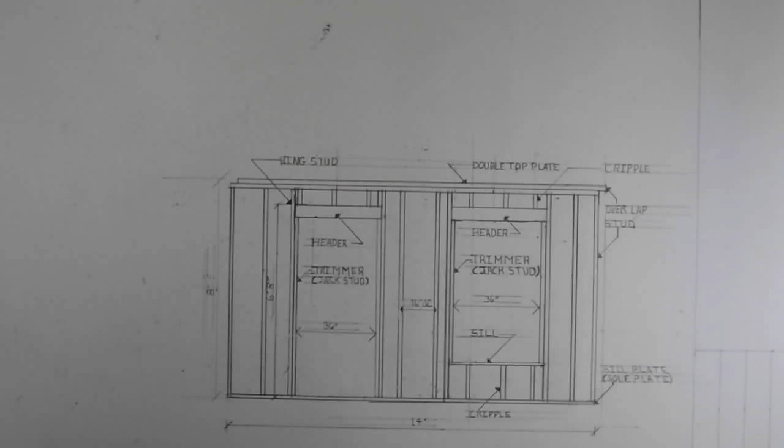Okay, this is part of what we're going to be drawing on this page. And again, this is a 12 by 18 page. We're going to have a total of 3 pictures on here. This one right here is a wall panel. Then we're also going to show a kind of a cutaway view of a wall here, showing the materials that are inside of the wall.

And then up over in the left-hand corner, we're going to have, let's see, I planned to put something there and I forgot what it was. Oh yeah, how the wall meets with the ceiling section and the roof and everything else. But this is a wall panel. This is 14 feet by 8 feet tall. Okay, and it's made up of all these different parts.

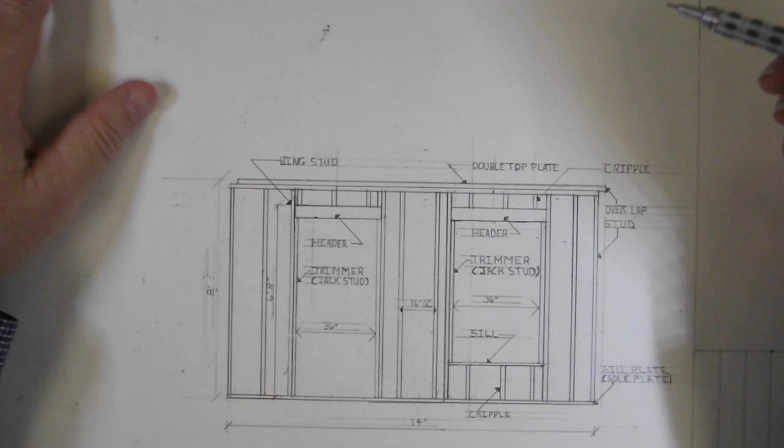And of course, the only reason it looks so busy right now, normally it wouldn't look like this if you were just drawing this for a regular plan. But because this is a lesson, you have to know all the parts and what they're called. You need to know all these parts very well, okay? So don't come to me and ask me about what size a thingy should be. You need to be able to name something and tell me exactly what it is. But anyway, I'll kind of go over those parts here.

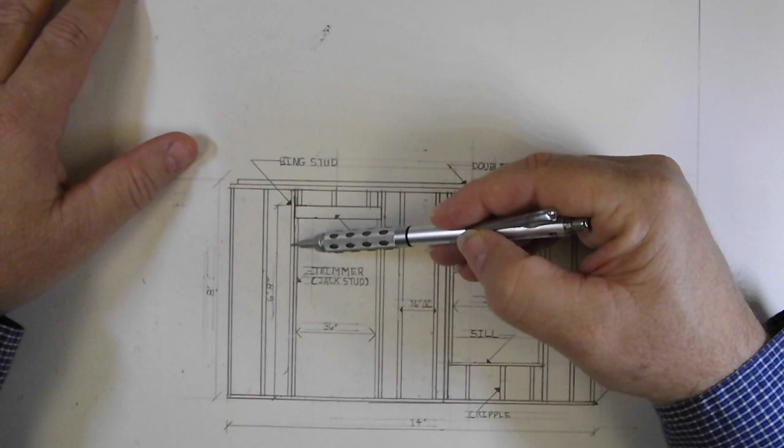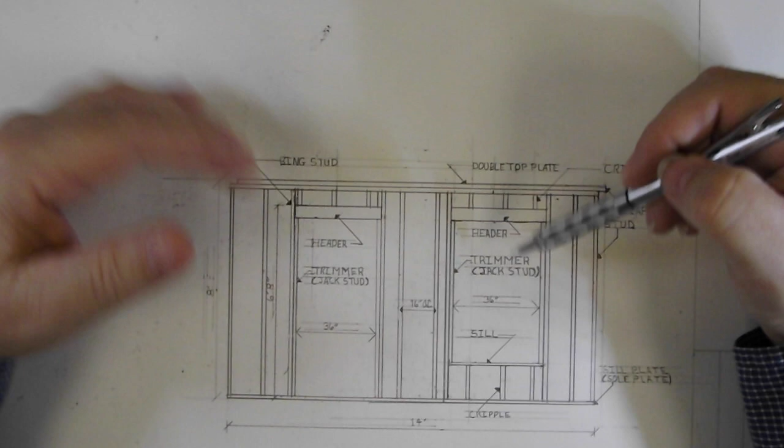King stud, that is the stud that always runs alongside any hole that is cut into your wall panel, such as, here's a door and here's a window. And you see I have king studs on both sides, king stud here and a king stud here. Okay, and that's just to add additional support, because anytime you cut away any members inside of the wall, then you're actually jeopardizing the integrity of the wall. However, we shore that up with things like king studs, and there's a few other components here that we shore that up with.

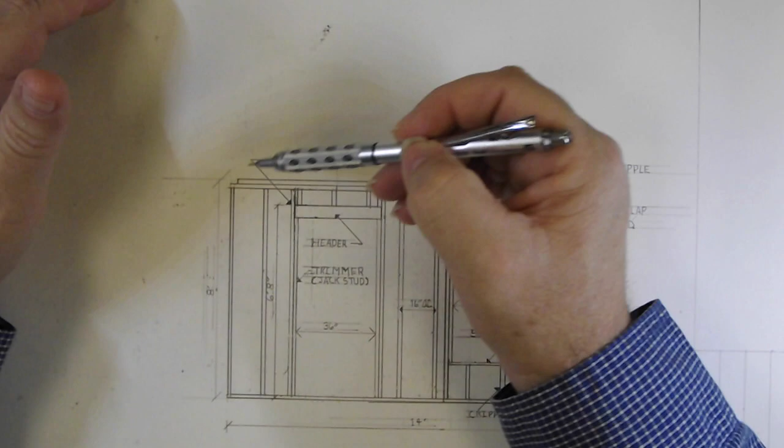Along the top here we have what's called a double top plate. So there's two 2x4s stacked one on top of the other. On one side it overhangs, there's an overlap to it. All right, and on this side there's a recess to it. All right, and that's so that 2 panels can fit together. And if you can look at this and imagine how this end would fit into this end, you'll see how that works.

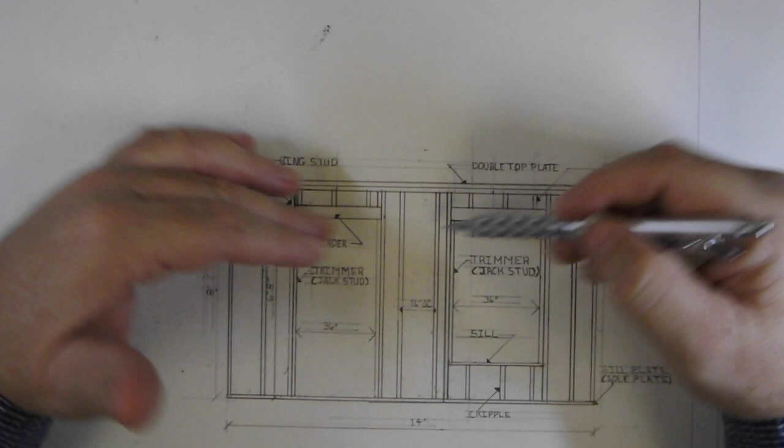Then we have the regular studs, which are 16 inches on center. Okay, and on 16 inches on center, the king studs do not count in that. Okay, because the king studs aren't added until later, until you cut the access into the wall. So 16-inch on center studs, and of course I measured from this way going this way. It doesn't matter which side you start with, as long as they're 16 inches on center until the very last one. The very last one may come up a little bit short of that.

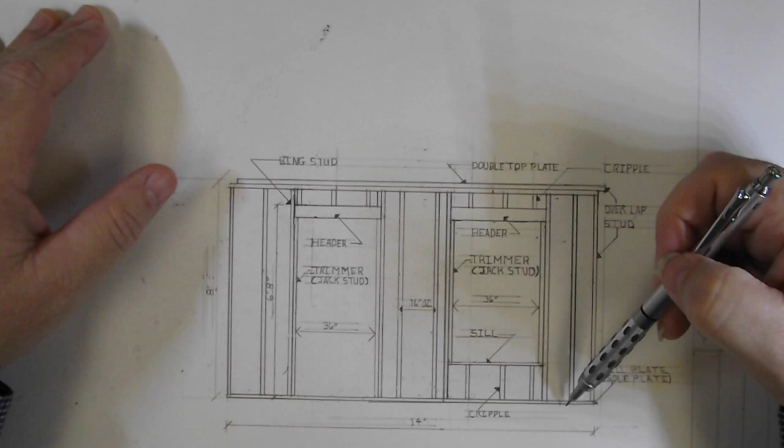Let's see, down at the bottom we have the sill plate or sole plate. It can be called either thing, sill plate, sole plate. Now in the door we have a header. Okay, a header right here is a 2x6 header, and a 2x6 of course is not really 6 inches wide, 6 inches this way. It's actually 5.5 inches. Okay, so it's a 2x6 in name only.

And I'll show you how those are put together, and that might be another drawing that we put on this paper showing how these headers are put together, because it's not just a single board. It's actually 2 2x6s sandwiched together with a piece of plywood between them.

And that provides the additional strength above the doors and the windows. Typically this type of header is for load-bearing walls. Sometimes you'll see headers that are a bit thicker, maybe 8 inches or even 10 inches, depending on the span and also depending on the weight that is going to be bearing down on it.

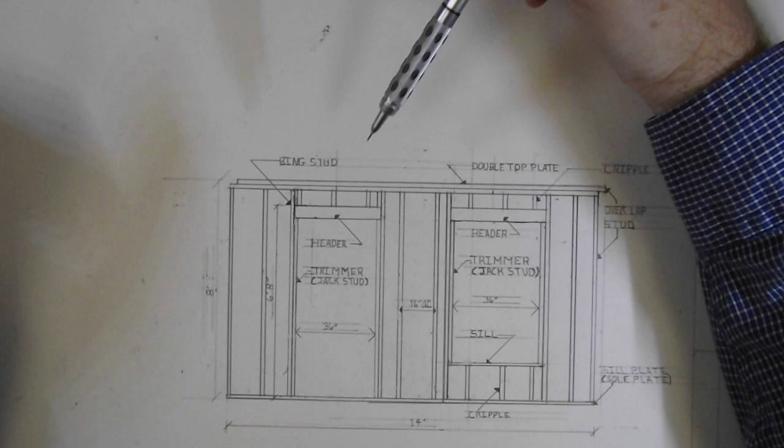Now, interior walls inside the house that are just what we call partitions, that are not really supporting any weight, would not require headers like this for, let's say, doorways. They would just require regular boards. But these boards up top here, these are called cripples. And above the window as well, those are cripples.

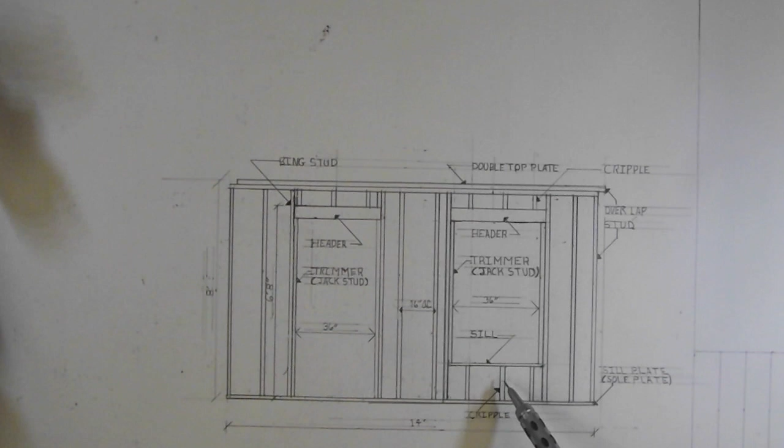They're really short boards, and basically they're the boards left after the window access has been cut away. We also have cripples down at the bottom, and these are basically just the continuation of these cripples up here, and they are part of the regular stud system where everything is spaced 16 inches on center. Okay.

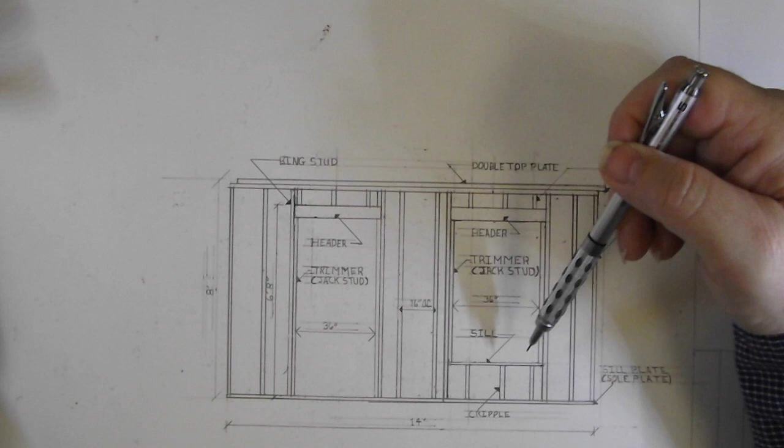In the window, we also have a header. It's also a 2x6 header. And we have a sill at the bottom here; some people call it a window sill. And we have trimmer studs or jack studs, and those are the studs that are inside the window that basically prop up the header. As you can see how that fits together, they prop up the header.

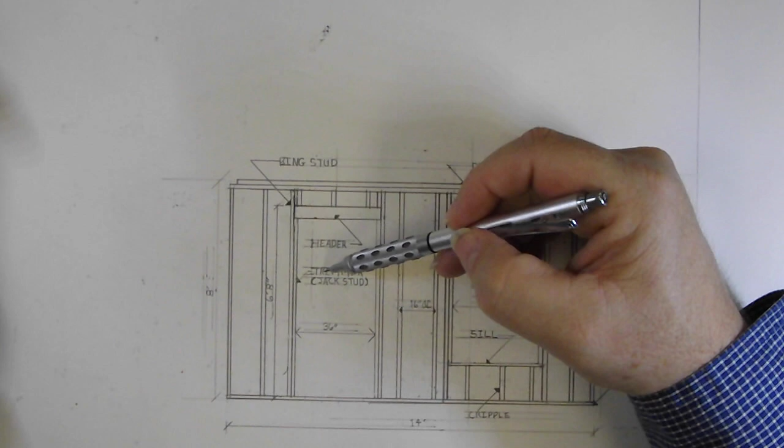And the same thing over here in the door. We also have trimmer studs or jack studs also propping up the header. These are right below the header, okay? And it kind of forms a two stud system there right next to the door.

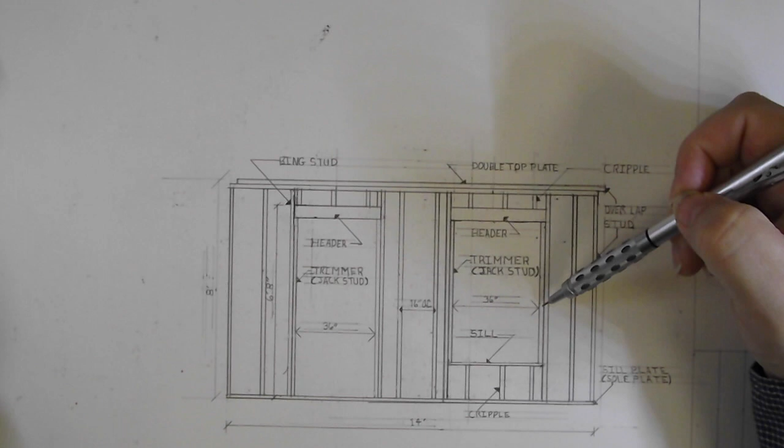And let's see, what else do we have here? We have the window itself, 36 inches wide. I did not put the measurement down here, but I will before I put this up for viewing. But that's actually 18 inches from the floor, and that's not anything written in stone. Your window can be as high as you want, within code, of course. There are some code regulations involved there, and we'll discuss those a little bit later.

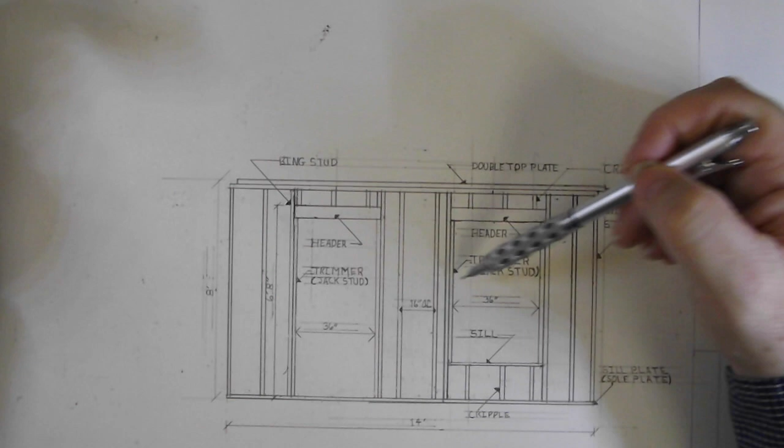But it's 36 inches wide. The reason it is the size it is does have to do with code, to make sure that we achieve a certain type of clearance. And the door itself is 36 inches, so this is a door that's facing to the outside, and in my imagination, this is the front door. The front door, 36 inches wide. It doesn't have to be 36 inches.

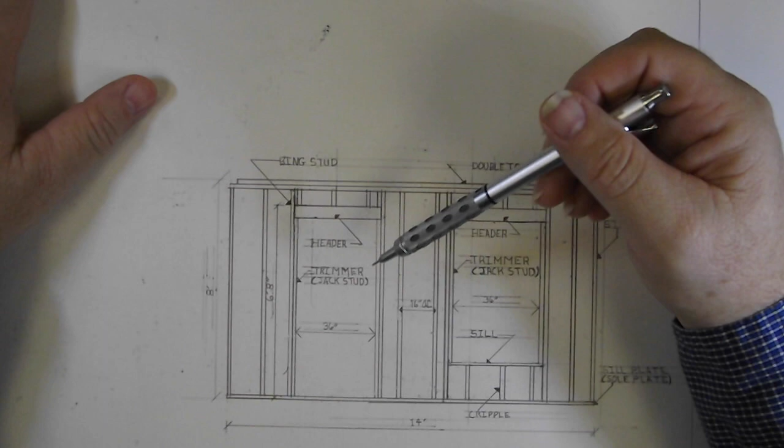Code states that at least one door should be at least 32 inches wide. It used to state that it was 36 inches wide, and people have just really stuck with that. I'm not sure why they reduced that to 32 inches, but people are still going to want you to put a 36-inch door on the front because that's how you can get furniture in and out of your house when you're moving in or moving out or buying new furniture.

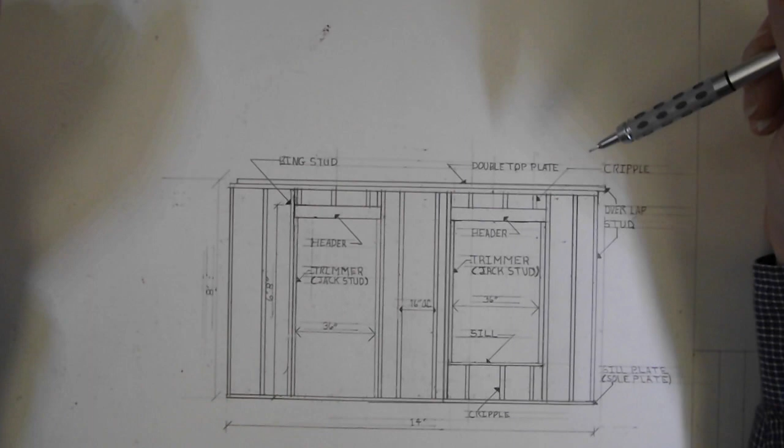And furniture manufacturers know this as well, and that's why they build their furniture keeping in mind that you're going to want to bring it in your front door somehow. And that really is it on the wall. Now I'm going to show you how to actually draw the wall and some of the tips and things that I do to get this done right. So I'm going to start with a fresh piece of paper.